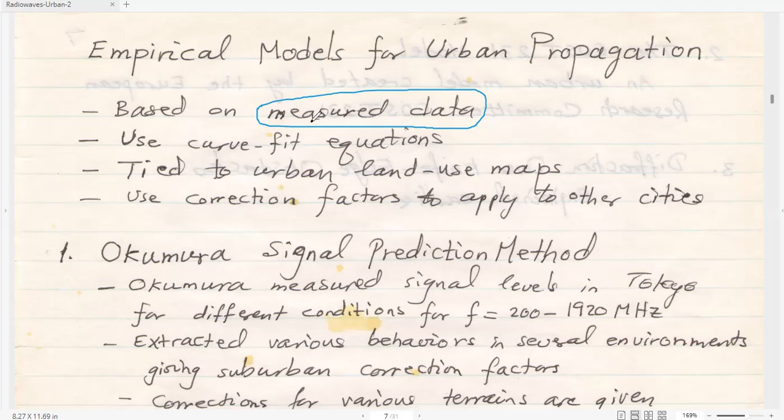Now, the empirical models. These models are based on measured data, based on actual measurements made in the cities, and use curve-fit equations. Equations can be extracted from the graphs or from the data by curve fitting. You know this from numerical analysis courses - curve fitting, to fit an equation to a curve, to extract an equation from a curve.

And also the equations, or the models, are tied to urban land use maps - how the land is used in the city, how many buildings are, for example, within 500 meters squared, what's the total area of the buildings within this area, and so on. This is the meaning of tied to urban land use maps.

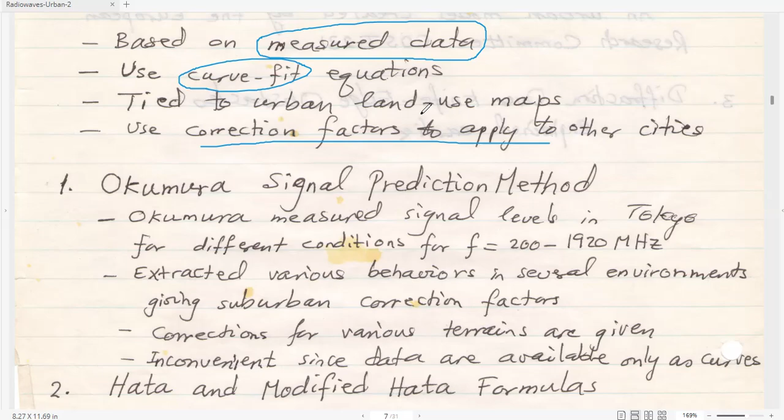Also, this model will be most suited to the place where measurements were made. But if we want to use it in another place, we have to use correction factors. We may have different building densities, or different building heights, or different building areas, or different distributions. We may also have different geography, with more mountains or more valleys. So we have to take all these factors into account.

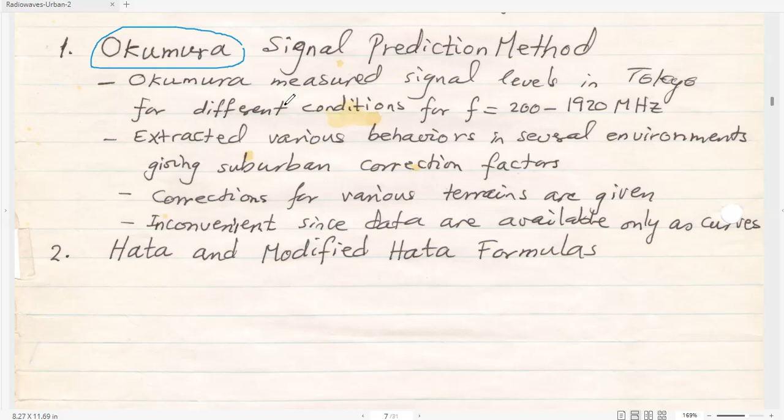One of these models is the Okumura signal prediction model. Okumura is a Japanese person. He made measurements for the signal level in Tokyo for the frequency range from 200 to 1920 megahertz, that is from 200 megahertz to 1.92 gigahertz. He also extracted various behaviors in several environments, giving suburban correction factors, because urban measurement would be different from suburban.

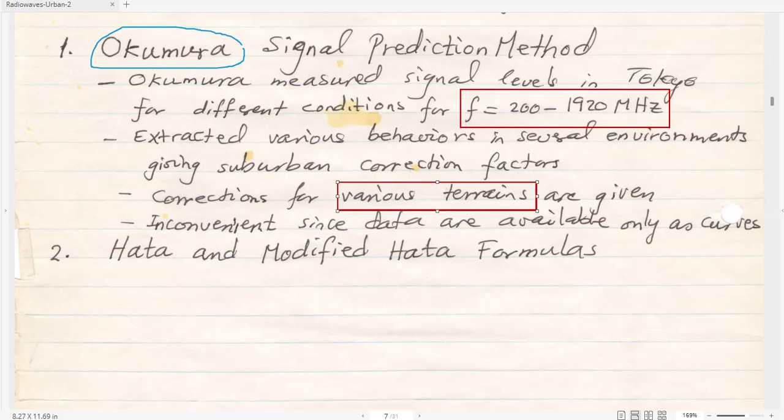So he gave correction factors for suburban areas. And also, as we said, the terrain may be different, so he gave correction factors for various terrains - if mountains, valleys, or plains.

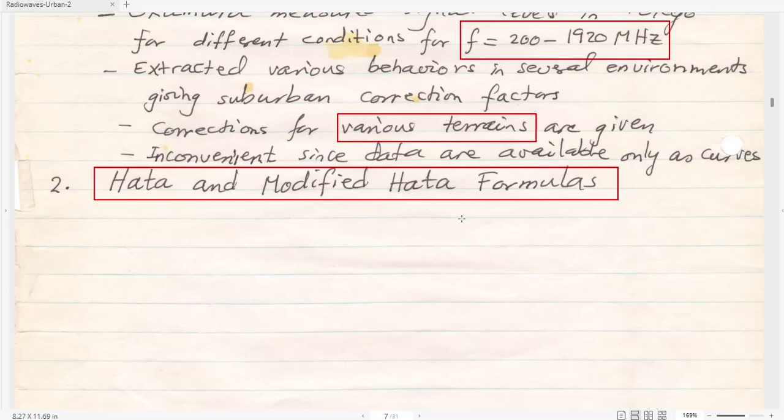His results were inconvenient because data were available only as curves, no equations. So Hata, also another Japanese person, extracted useful formulas from Okumura's measurements, and his model became known as the modified Hata formulas.

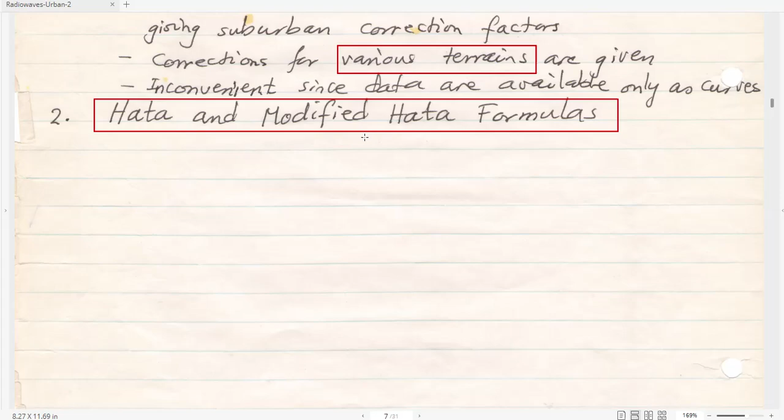So the Hata model tries to put the equations, the extracted curve fitting equations, in this form: A plus B log D. A is not a constant, of course - this means that A does not depend on D, and B does not depend on D. D is the distance between the transmitter and the receiver.

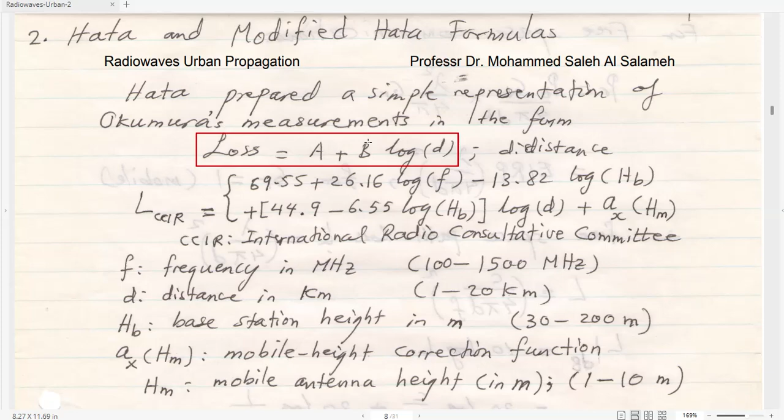So A depends on the frequency and the height, but not on the distance. And B also can depend on the gain of the antenna, the height of the antenna, the frequency of operation, but it does not depend on the distance. This is the Hata model, as you can see here, this equation.

CCIR, the International Radio Consultative Committee, adopted this model to be used internationally. This is A here - A is 69.55 plus 26.16 log of the frequency, so we do not have distance here, minus 13.82 log HB, the base station height. So no distance here, just frequency and base station height.

Now B, the parameter B, is given by this equation. This is A here, and this is B here.

B is equal to 44.9 minus 6.55 log HB, the base station height - it does not have distance again. And we have log D here - we take log D. Plus also a correction factor for the mobile height.

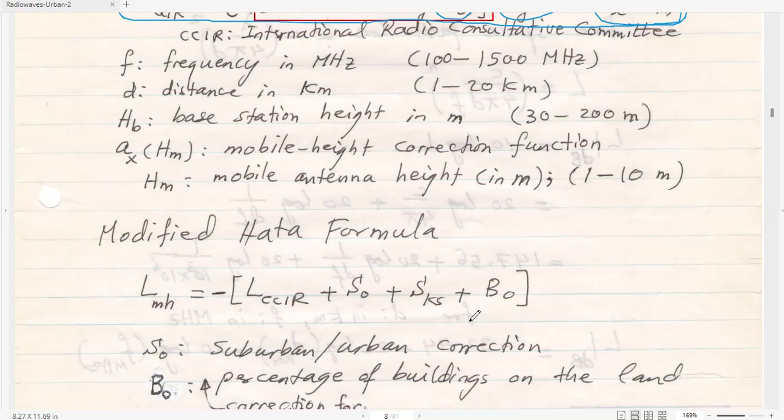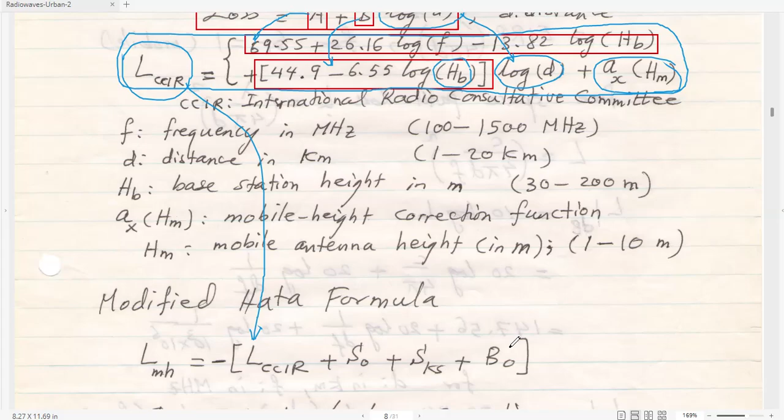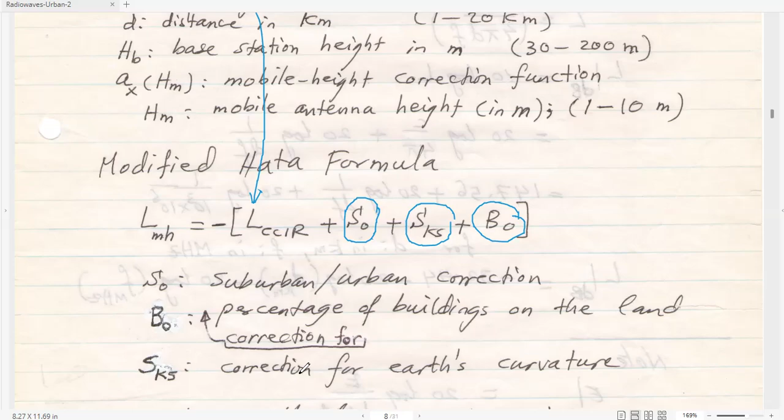Hata formula: we take LCCIR, take this formula here, plug it in, and add correction factors. S naught is the suburban/urban correction factor, used to predict whether you are in the urban area or in the suburban regions of the urban area. B naught is the correction factor for the percentage of buildings on the land, which changes depending on that percentage. And SKS is the correction factor for Earth's curvature, which you put in to correct for Earth's curvature, used especially for long distances D.

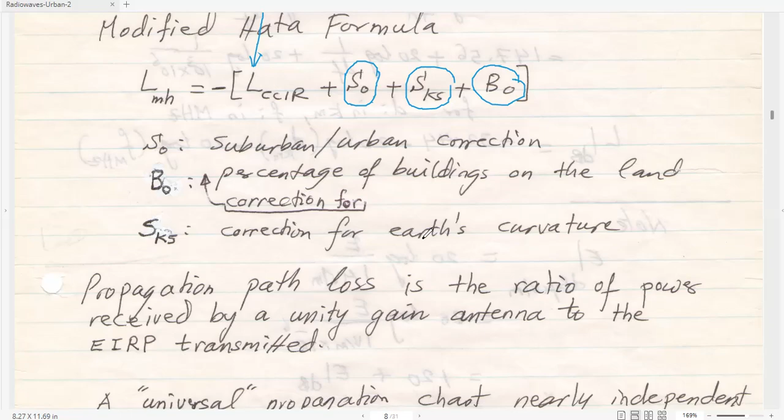Now, from Friis transmission formula, P received power at the receiver equals P transmitted times the gain, minus losses due to the feed line, times lambda over 4 pi r squared for free space propagation, times the gain of the receiver and so on.

Let's concentrate on this free space loss term. You can see the loss depends on the wavelength, and wavelength depends on frequency, so the loss is frequency dependent. We want an equation we'll call the universal propagation chart, where the loss is frequency independent. This can be generated from the following equation.

The incident wave on the receiver equals transmitter power divided by the area of the sphere, 4 pi D squared, times the gain of the transmitter. This gives the incident radiation power density near the receiver, where the transmitter is D meters or D kilometers away.

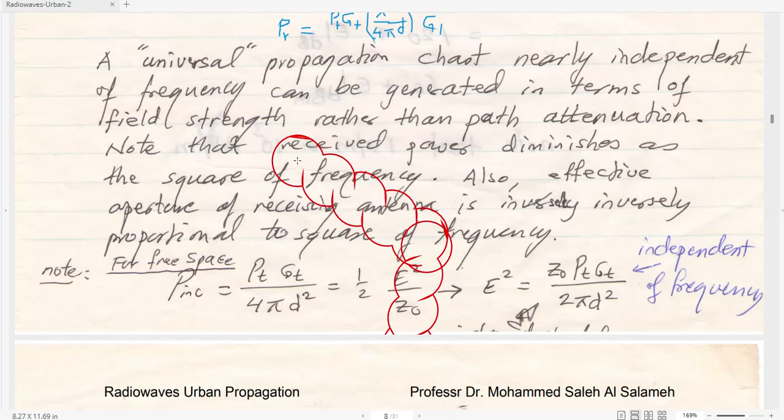This is the equation for power density in terms of the electric field and the intrinsic wave impedance. For free space, it's 120 pi, equal to 377 ohms. From this equation, with E squared, you cancel the 2's and take Z naught to this side, obtaining E squared equals Z naught times PT GT over 2 pi D squared.

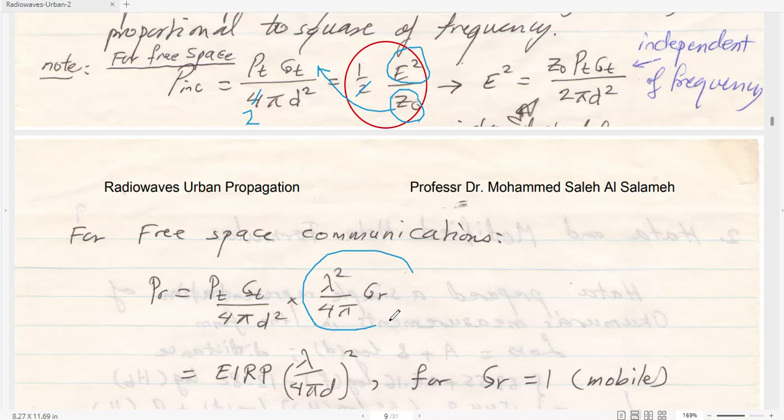You can see that the electric field equation here does not depend on frequency, that's why we call it universal. And here, this is the same equation as before: P received equals P transmitted times G transmitted over 4 pi D squared, times the effective area of the receiver. Now we introduce this definition: P transmitter times G transmitter is EIRP.

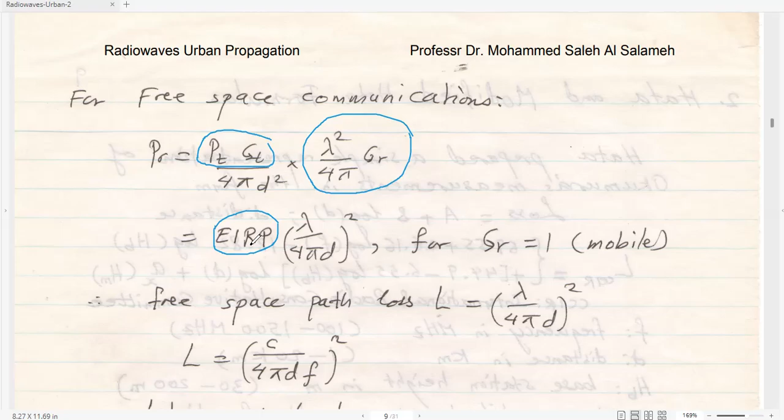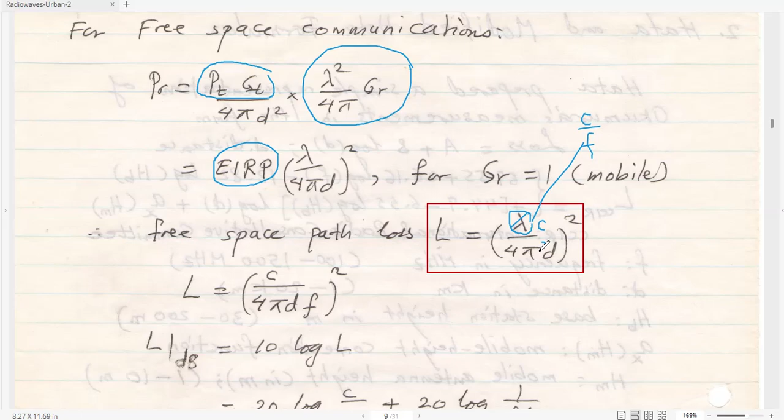We already talked about this during the satellite communications and radio propagation session. Effective isotropically radiated power simply equals the transmitter power times the gain of the transmitter antenna. The free space loss is given by lambda over 4 pi d squared, where lambda is the wavelength and d is the distance between transmitter and receiver. Since lambda equals C over F, speed of light over frequency, we cancel lambda and substitute C over F, obtaining C over 4 pi d F squared. This is the free space loss.

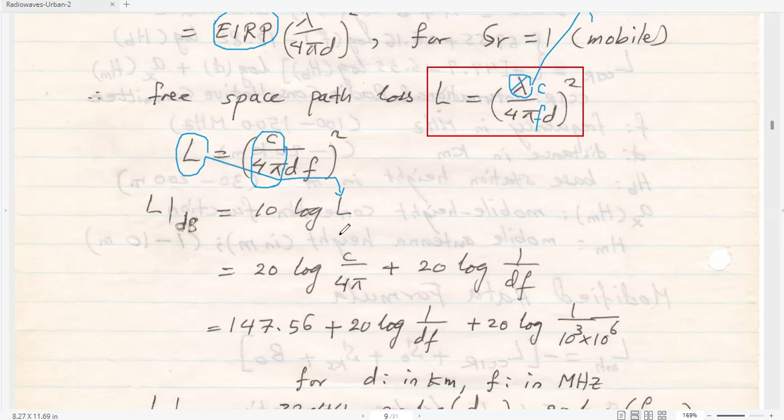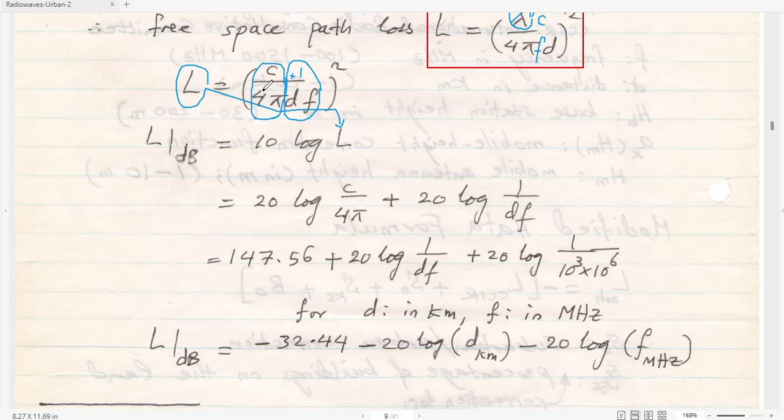In dB, you take 10 log of this L. Since it's squared, it becomes 20 log of C over 4 pi times 1 over dF. Multiplication becomes addition in logs, so it's 20 log of C over 4 pi, plus 20 log of 1 over dF.

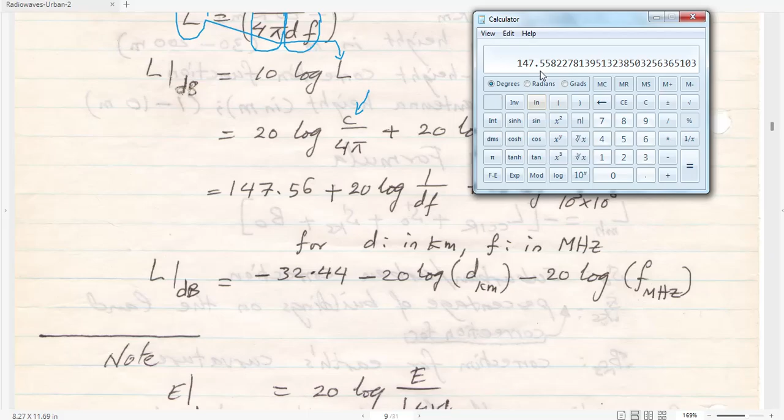Now for C over 4 pi, we introduce the value of C, 3 times 10 to the 8 meters per second, and obtain this value: 3 times 10 to the 8 divided by 4 divided by pi, and taking 20 log of this value gives approximately 147.56.

Now D in this equation is in meters and F is in hertz. If we want D in kilometers, we multiply by 10 to the 3. If we put F in megahertz, we multiply by 10 to the 6. So this becomes 20 log of 1 over D times 1 over F, which is minus 20 log D minus 20 log F, with D in kilometers and F in megahertz.

We also take the log of 10 to the 3 times 10 to the 6, which is 10 to the 9, becoming 10 to minus 9 in the numerator. 10 to minus 9 times 20 is minus 180. So minus 180 minus 20 log D minus 20 log F plus 147.56 equals minus 32.44.

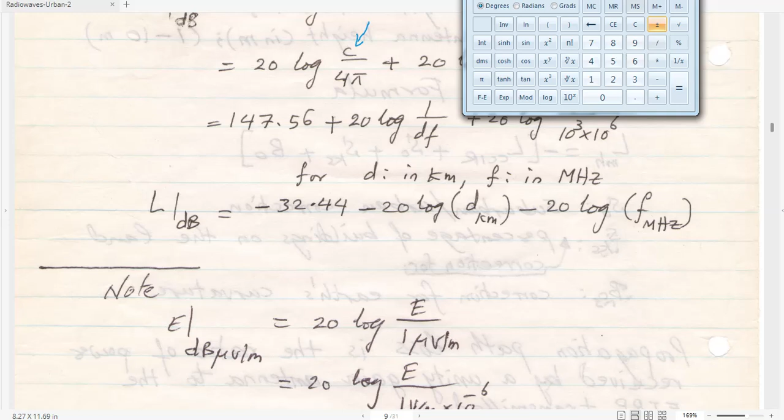So this is the free space loss.

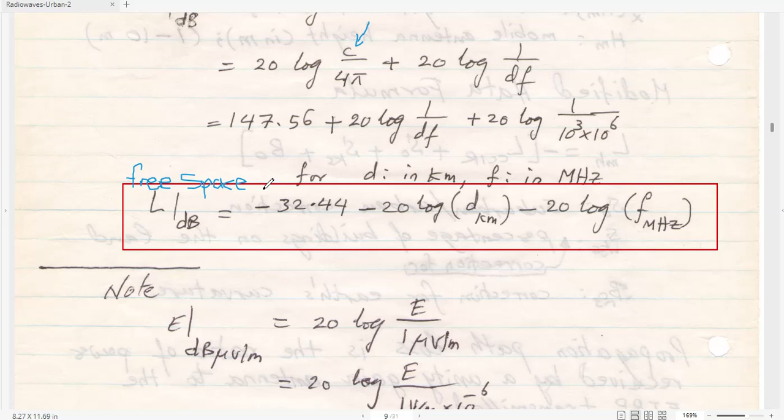Definitions here: E in dB microvolt per meter is 20 log E divided by 1 microvolt per meter. 1 micro is 10 to minus 6. When it goes up, it will be 10 to 6. 6 times 20 is 120.

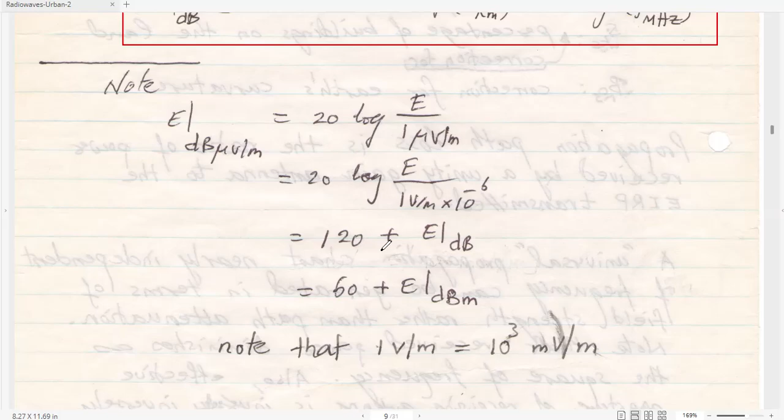So E dB microvolt per meter equals 120 plus E dB. And if you want to use E dBm, the difference would be 60. Because dBm is 10 to minus 3, which becomes 10 to 3. 3 times 20 is 60, and you subtract 60 from 120, giving you 60 here.

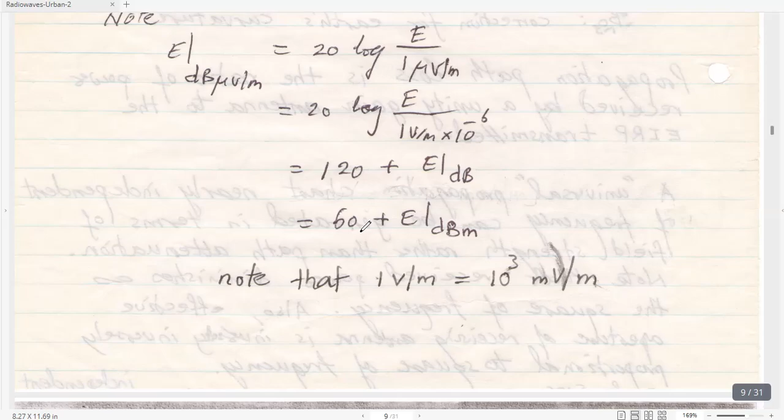So 1 volt per meter is 10 to the 3 millivolt per meter. That's the difference.

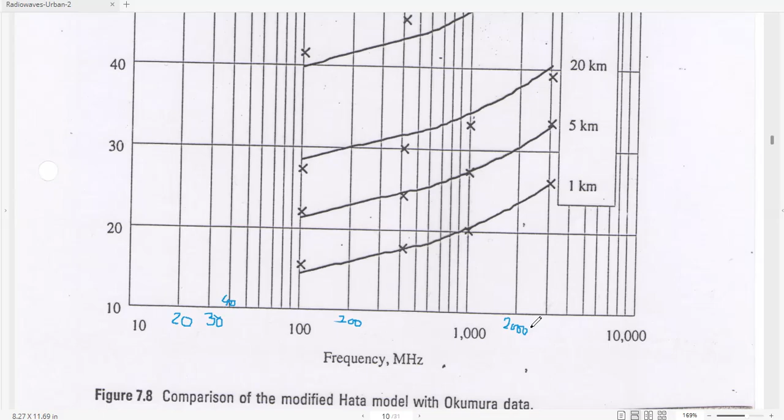The vertical axis here is the loss in dB. This is not free space, but urban propagation loss, urban area. The base station height is 200 meters, and the mobile height is 3 meters.

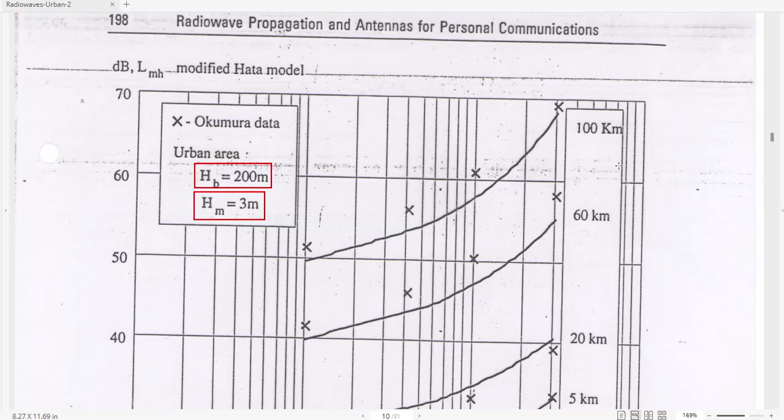This represents the distance between transmitter and receiver. This curve is for 100 kilometers distance, so the loss is high. When the distance is lower, 60 kilometers, the loss is lower, in the range between 50 and 70. Here, with smaller distance, the range is between 40 and 55 dB.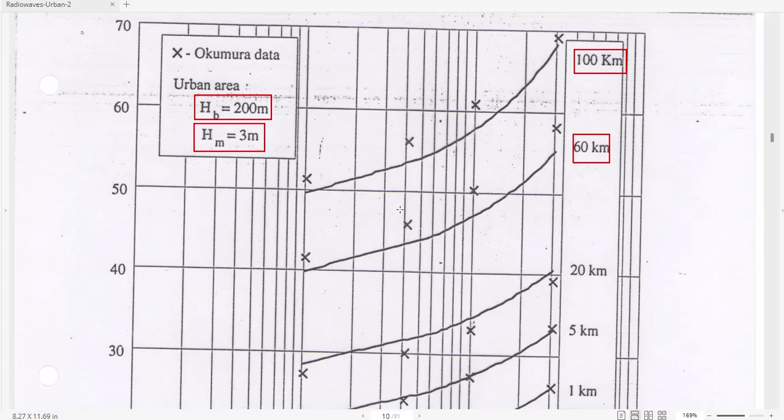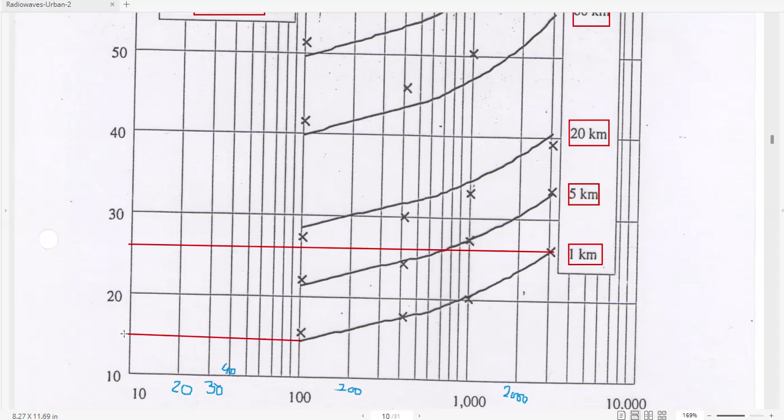This is for 20 kilometer distance, this for 5 kilometer distance, and this for 1 kilometer distance. At 1 kilometer the loss is much lower, between 15 and 25. Here you can see it's around 15 or maybe 16, and here 15 and 26. But for large distances the loss is between 50 and maybe 69 dB.

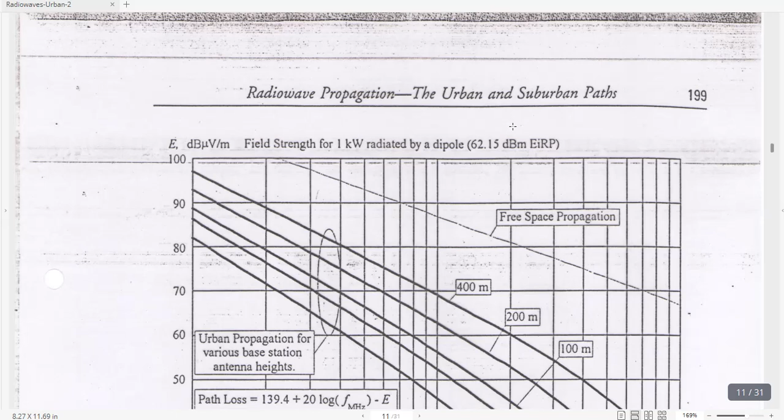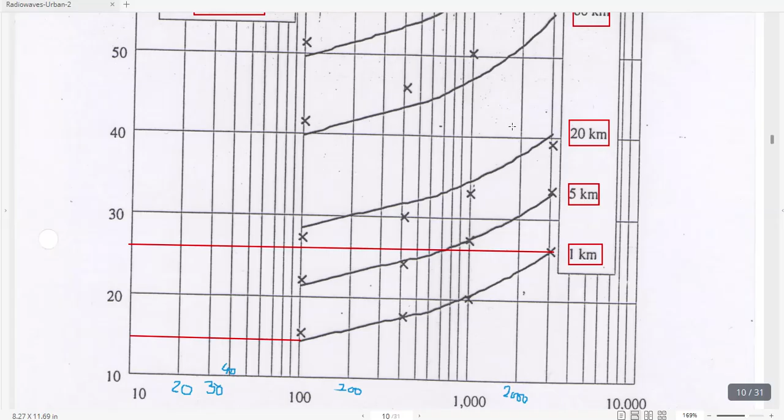This is the universal urban area propagation curves. When we put loss here, it depends on the frequency, as you can see. But when we put electric field here instead, as explained earlier, the vertical axis is electric field in dB microvolt per meter.

There is no frequency here, only range/distance, and the height of the base station antenna, and that's all. We get E in dB microvolt per meter. After that we put the E value here, the electric field value, and put the frequency, to obtain the path loss.

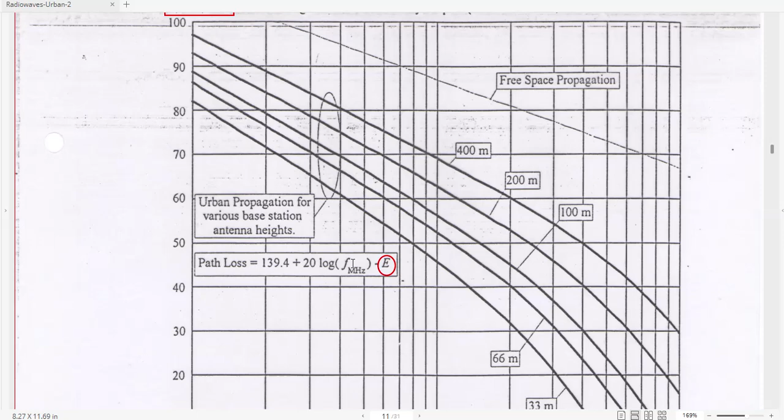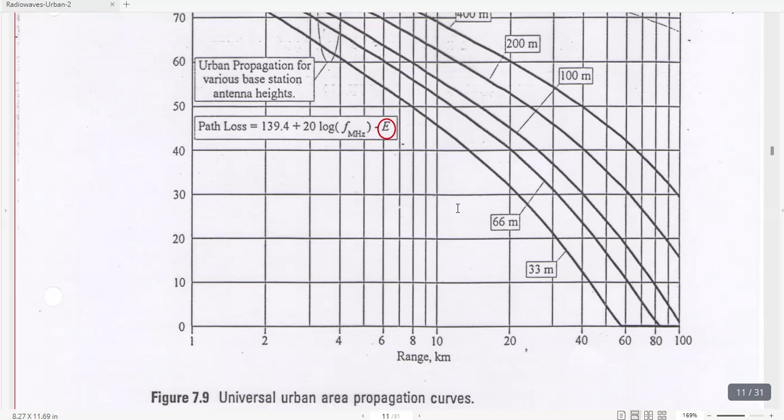So it is a two-step process. We first find the electric field in dB microvolt per meter, depending on the antenna height and the distance. Then we put the obtained electric field and the frequency to get the path loss in dB.

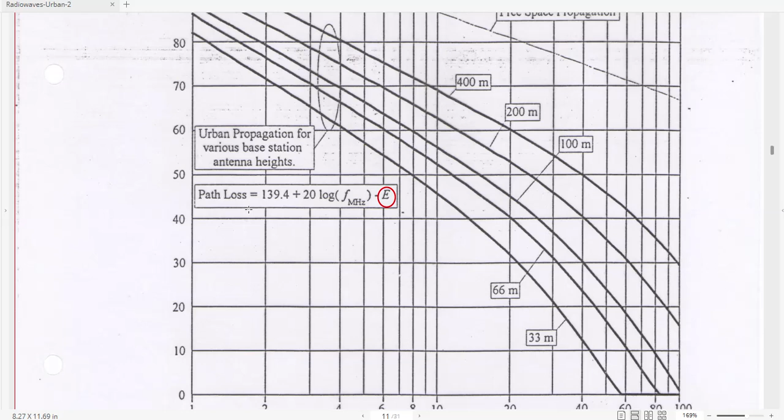I want to explain this number: field strength for 1 kilowatt radiated by a dipole. How did we get 62.15 dBm EIRP, effective isotropically radiated power? EIRP is PT times G, so in dB it's PT plus GT in dB, plus the transmitter antenna power gain in dB.

1 kilowatt in dB is 10 to 3, which is 30 dB. If you want dBm, it will be 60 dBm, because 1 kilowatt is 30 dB, and you add another 30 since the difference between dB and dBm is 30 dB, so we get 60.

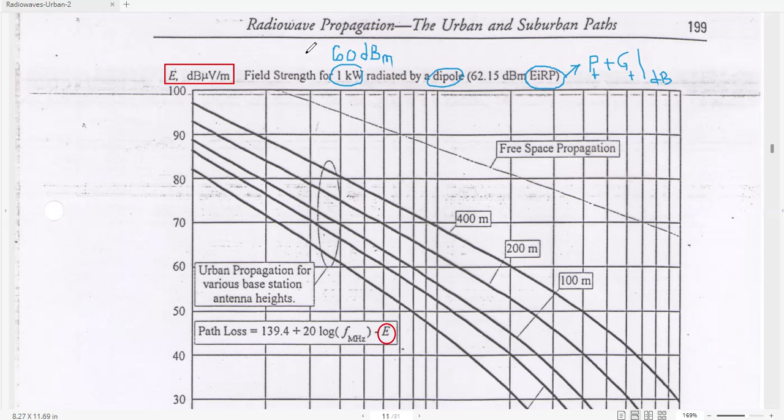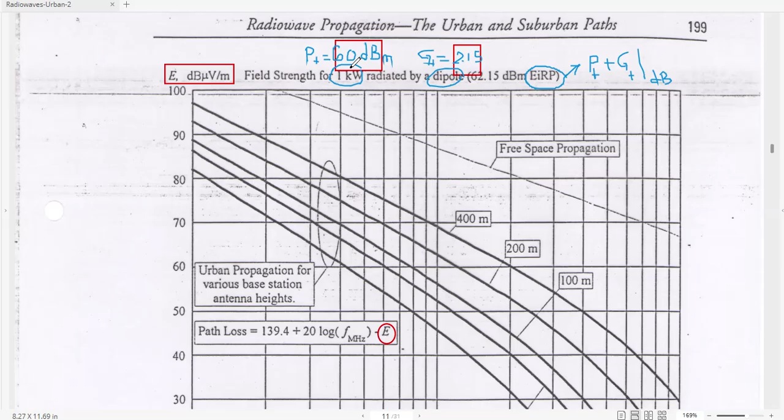And the gain of the dipole is 2.15. Dipole gain, this is PT in dBm, and dipole gain GT is equal to 2.15 dB. So add 60 plus 2.15, and you will get 60 plus 2.15 equals 62.15 dBm EIRP.

That's the idea of the universal curve. We have this equation now.

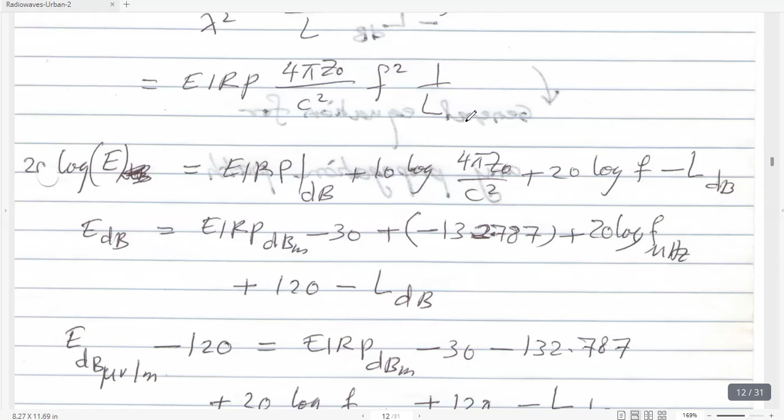I will stop here. I will derive this in the next session. I do not want this session to be very long.